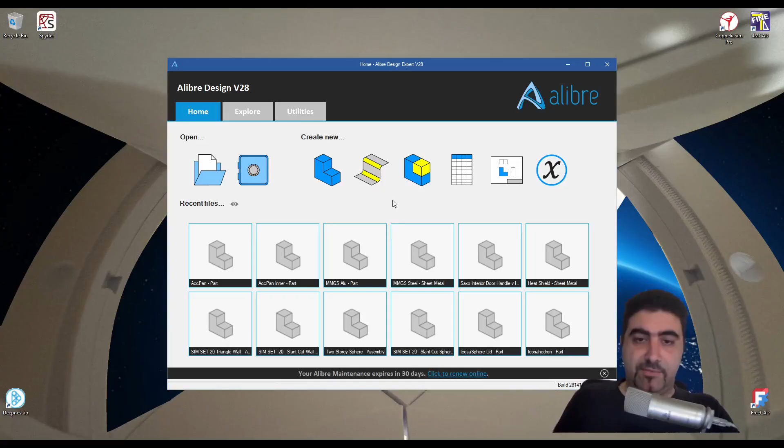With that out of the way, let's start a new sheet metal part. And for starters, I want to show you the shape that I'm after, right? So I'm going to start with a circle here, 120 millimeters, and I'm just going to convert it to a reference figure. And let's get a line going here. And okay, thank you. And a center arc. So this is roughly what I want to do.

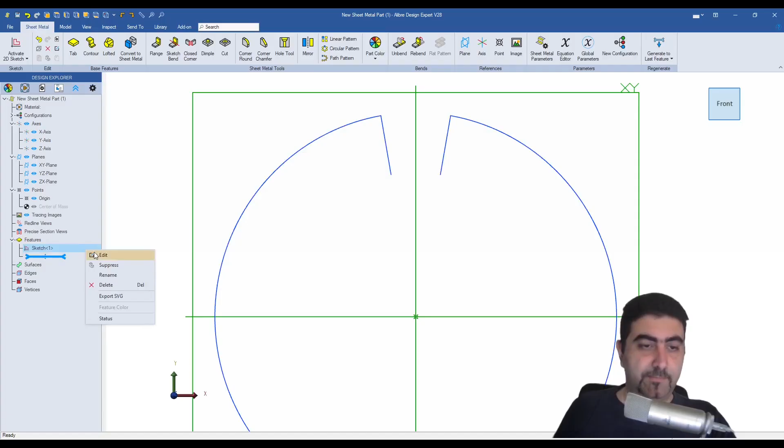Right, we'll make these two horizontal, and then we'll make these two horizontal, thereby making them symmetric. And then I'll just get this going through that center. Let's say that this opening is 20 degrees, and let's say that this other circle, you see it's not a full circle, it's giving me a radius. I hold shift and move it a bit and I get a diameter dimension.

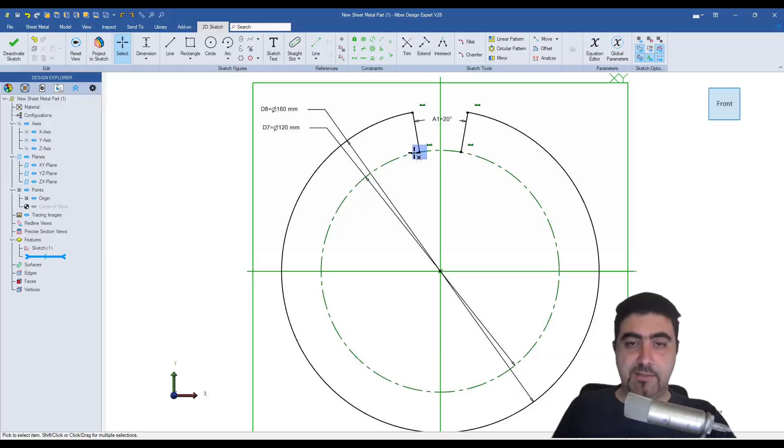Let's say that this is 160, which then in turn means that this line is 20 millimeters in length, right? So this is the rough shape I want to end up with. I want a couple of legs that also curve and go on there, and you can bolt it down, right? But I also need a bit of guide geometry, and I'll show you what I mean, right?

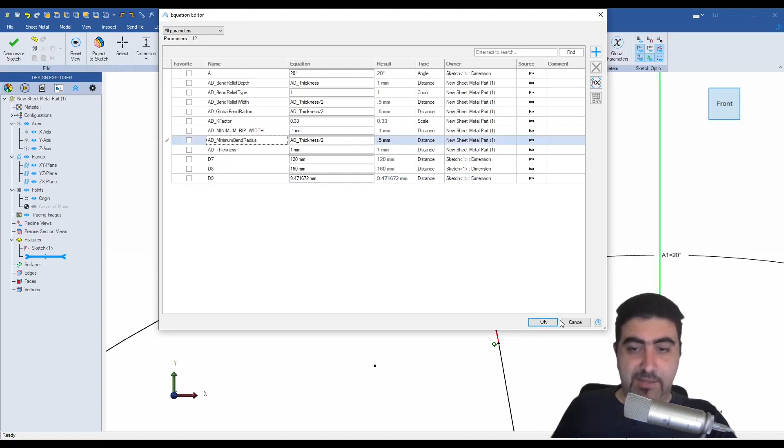I'll make an arc here. I'm doing all of this because I want to be able to take an angle. I'll make this equal to the minimum bend radius. Okay. And this can be a reference geometry. And these can be reference geometries too. So what I want actually is this angle. You see, it's not exactly 90 degrees. And I'll make that a parameter so I can use that.

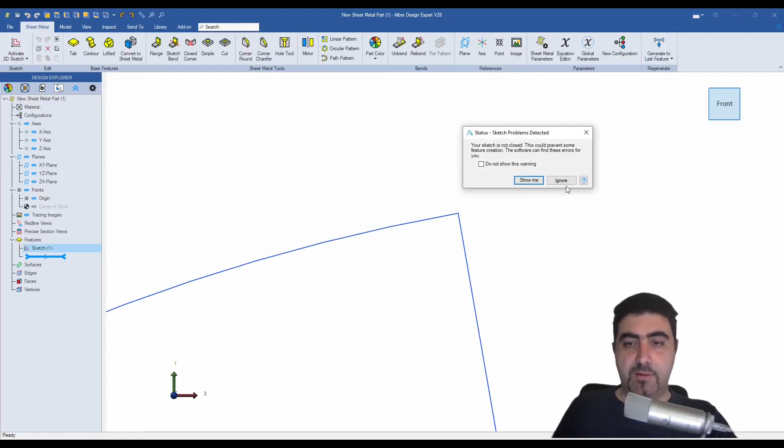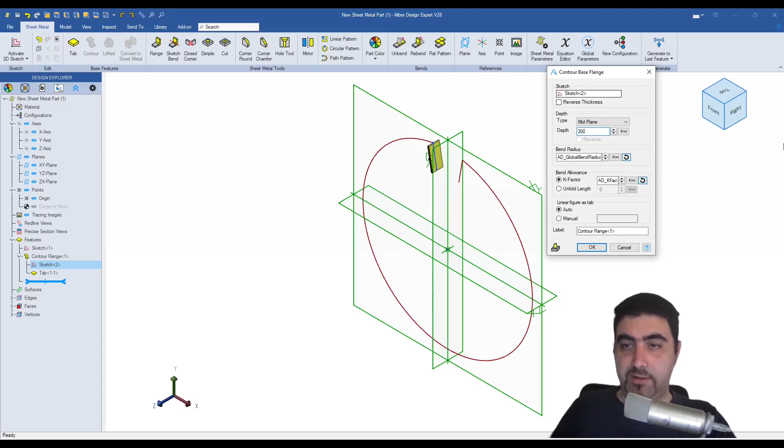Right? Now, sure enough, if I try and make a contour flange out of this, it doesn't like it. So what I'm going to do, I'm going to lift this up, you know, as a visual aid, if you like. And I'm going to project this first line in. I can do that because my sketches are toggled on. And now I'll make a contour flange. I want to make that 300 millimeters. And I want my material to be on the inside of my circle. So there you go, inside of my circle. So I'll start off with this.

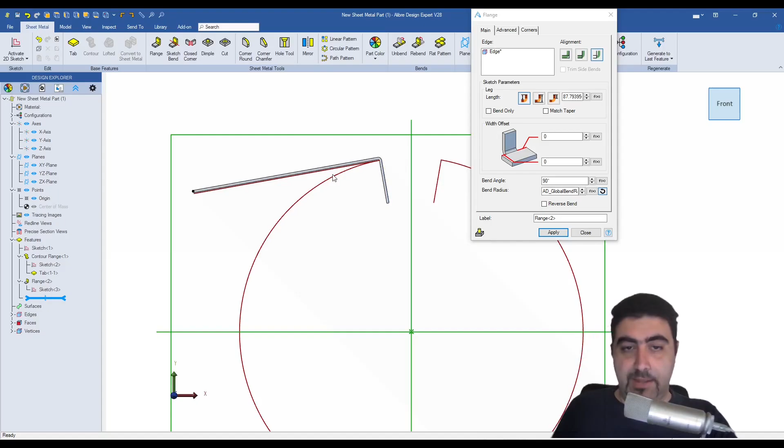Now, if I make a flange here, you'll see that I'm getting this bend angle here, and it's heading off to that direction. That's not what I want. I want it to go all the way around. And I know that this circle has a radius of 80 millimeters. But if I go and make this D8, even if I divide it by 2 to get the actual radius, look what's going on here. It's flying off to a completely different direction. That's not what I want, right? So I'll just bring that back.

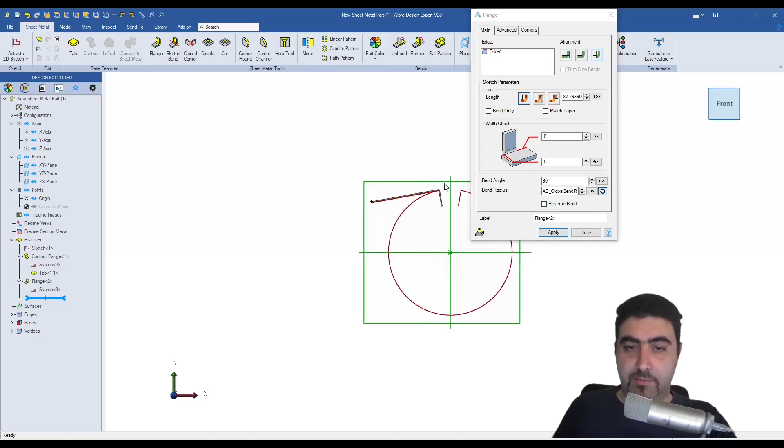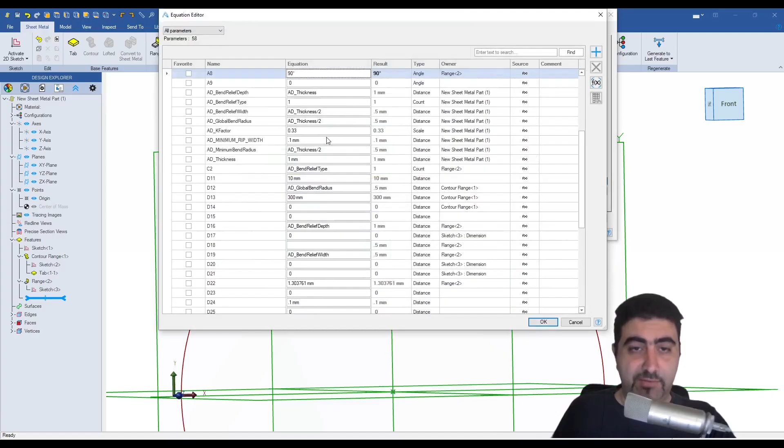So how do I do it, right? Well, first of all, I want it to be aligned towards the inside. So the way I do it is I don't make this flange. I click here in the bend only option, which is the option I want to show you today, right? Bend only. And you know, 90 degrees. Yeah, I don't want 90 degrees. I want the driven value that I got. So I want A2. So that's the angle that I want.

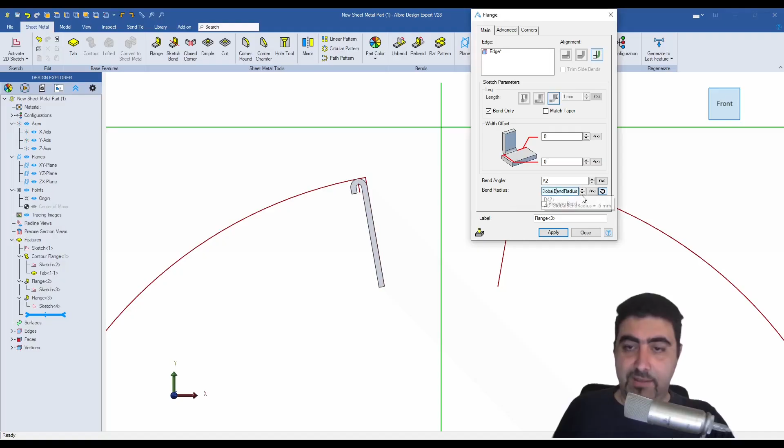Okay, well, what did we achieve here? Well, let's make a second flange on the inside again. Bend only is still selected, right? The angle we can talk about later. Let's look at it at this side. Now, if I change this, and it was D8 divided by 2, look what's going to happen. Look at that. It follows it pretty closely, and it goes around this circle.

Now, about the angle, well, I've got a 20-degree angle opening here, so if I say 340, look, it comes very close, right? You can see that it's coming really close, and that's pretty cool, right? Now, it's not following this circle precisely, and I'm not exactly sure how to make it follow that circle precisely. I've noticed that if I subtract half the thickness, it'll bring it in closer. But again, you can see it's not perfect.

Plus, this extends past this line. So how do we get that back? Well, we get that back by subtracting an angle here that's equal to the angle of a chord that has the length of twice the thickness. So we subtract, let's go into the equation editor, because that's a bit more comfortable.

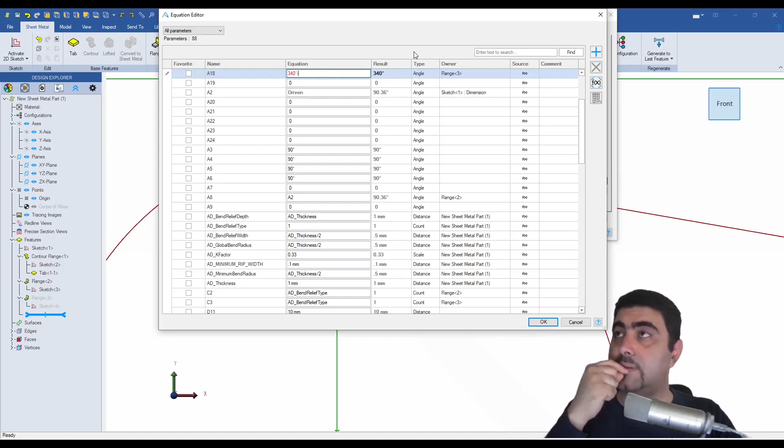So we subtract that chord, and the angle of a chord is the inverse sine of the chord length divided by the diameter. Is that right? It's twice the inverse sine of that. I'll put the equation up on screen. So let's go ahead and prepare that equation. So we want twice the thickness, divided by D8. Okay, now this is going to be pretty close.

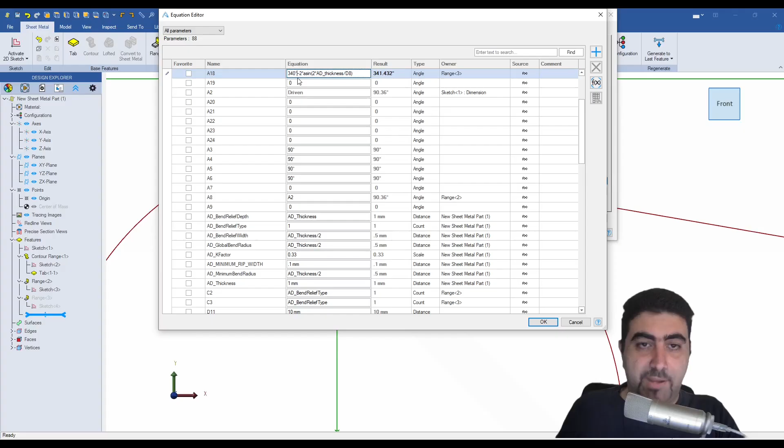Okay, if you look closely, I put the minus sign twice there. That's why it's adding. It only needs it once, and this should make more sense. Okay. Again, not perfect. I don't know why, but there you go. And now I can hit apply. Okay, so right, it's definitely usable in terms of a heat shield.

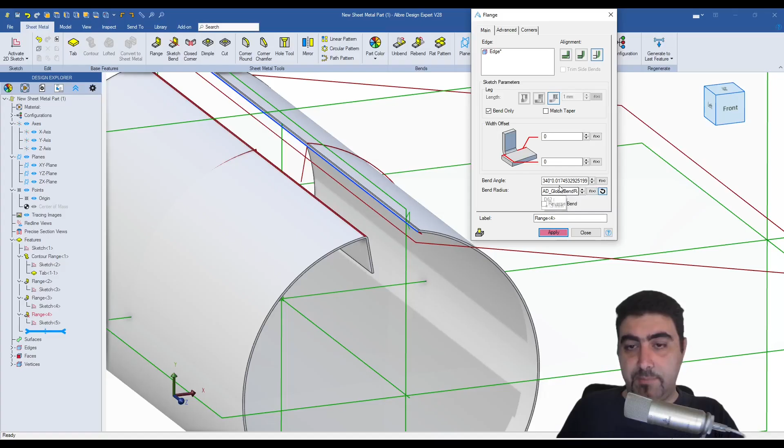So I'll make another flange here. Now I just want this to go back to the original bend radius, and I just need this to go back to 90 degrees. There you go. I've got my other bend, and I think it doesn't cooperate very well, but again, this is a part that I don't know another way to make, and I don't need it to be 100% accurate.

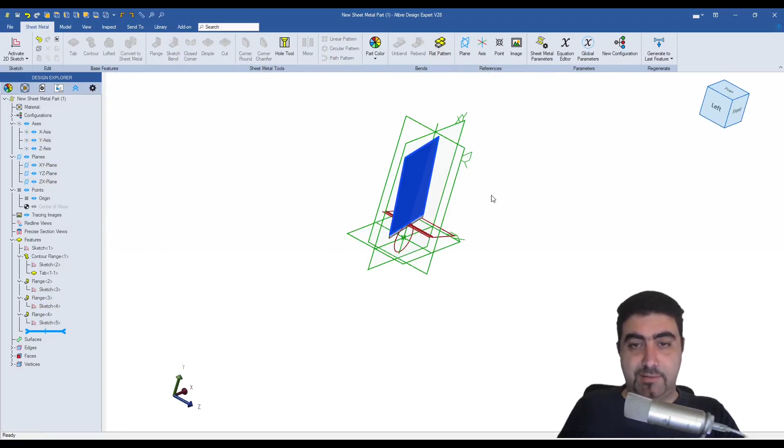But anyway, here's another cool tip. First of all, let me show you that this can actually flat pattern, right? No problem whatsoever. It creates the flat pattern. It's all well and good. Now, I want to get another leg that stops at the exact same point as this one does. So I'm going to do my imprinting trick, which I show in another video of mine. And I'll just make an angled rectangle here.

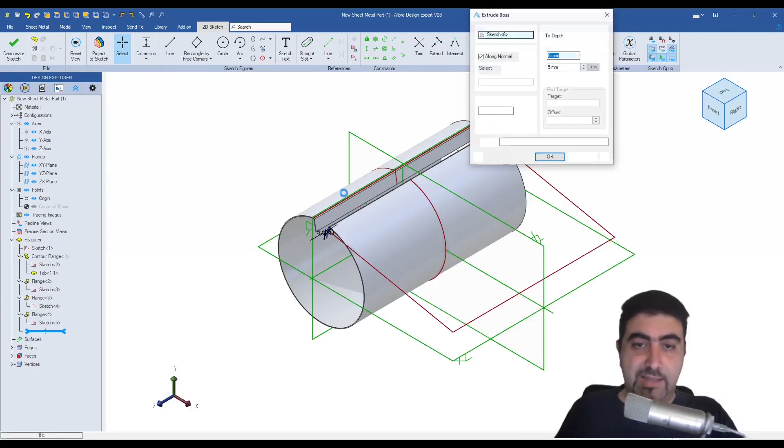And I'll make this point and this point horizontal. Now this is fully defined, even though it doesn't have a single dimension. And I will extrude up to this face. Come on, up to this face, right? Now, this is an extrusion, right? This is not a sheet metal tool. This is the normal extrusion that we all know and love, but you can still flat pattern it and it still works, right? Which is great.

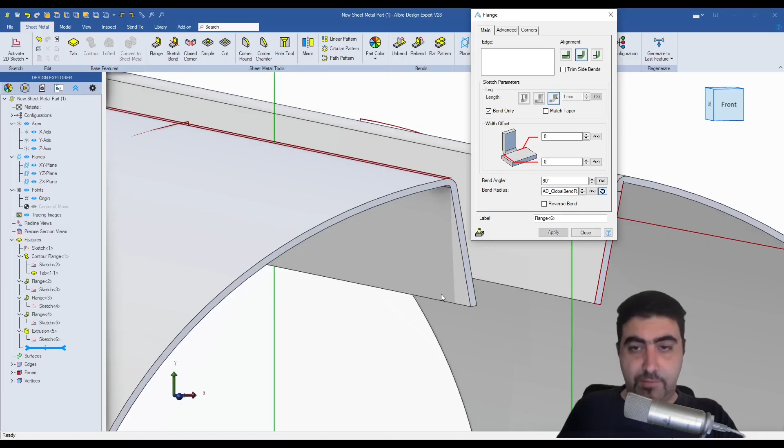And now I'll go and make the legs, and I will do it with the same basic principle that I've done everything else here. So now I'm going to make yet another flange like this, but now this radius is going to be the radius of the inner circle, right? And of course I don't need 90 degrees of that. That's too much. Let's do 15 degrees. Yeah, let's do 20 degrees. It's fine. Cool. And we'll do the same thing on the other side.

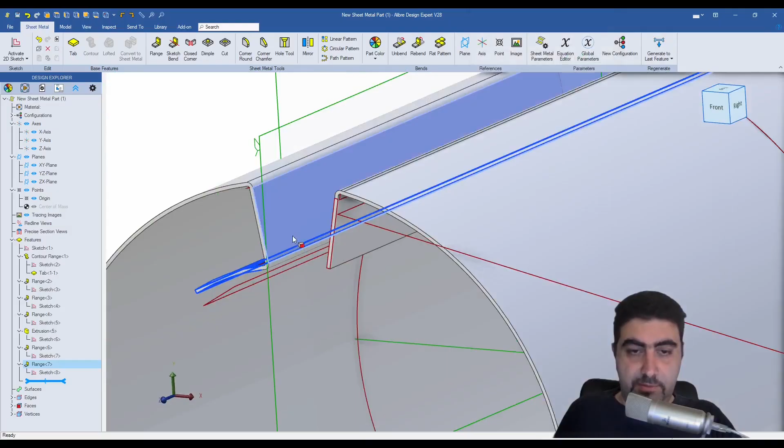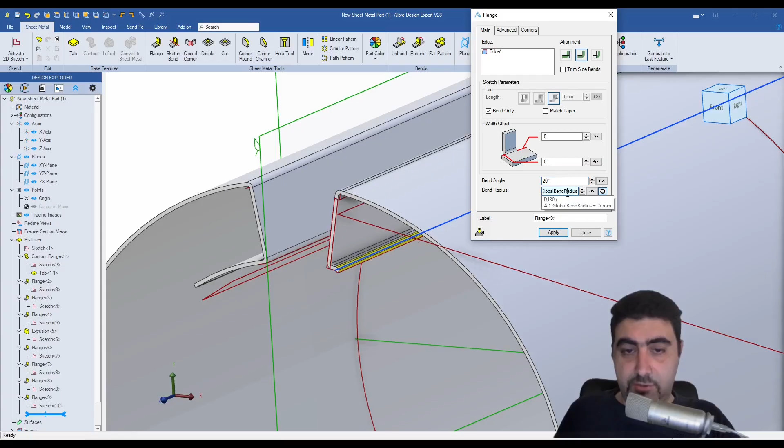Let's have nothing selected. There you go. Now only global bend radius, and this is 20 degrees. There you go. Oh, wait. We need to go back into this one and make sure it's aligned inwards. Okay, that's a lot better. And this is useless now, and this aligned inside. Now we're going to make this one. Same thing here. It needs to be on the outside. But again, these are not super critical dimensions, and I think it works well either way.

So now it doesn't want to cooperate. Oh yeah, well, okay, this is fine. Let's go back into sketch 1, and I'll turn this into a sketch as well. That way we can see how far off we are on both occasions, right? So this is it. For a part like this, it's nothing that a little bolting down is not going to cure.

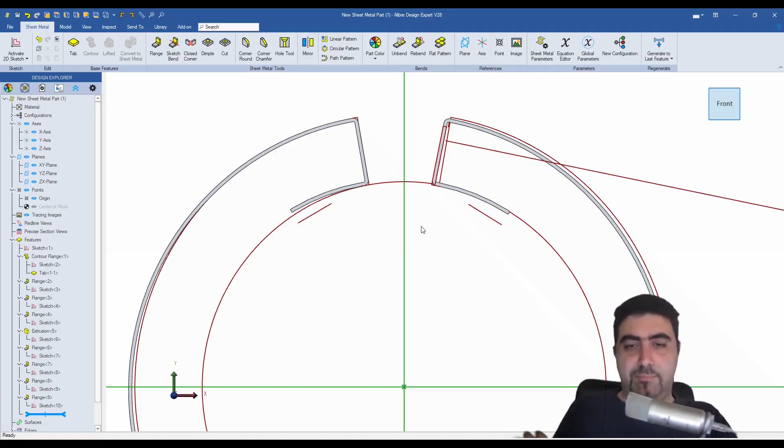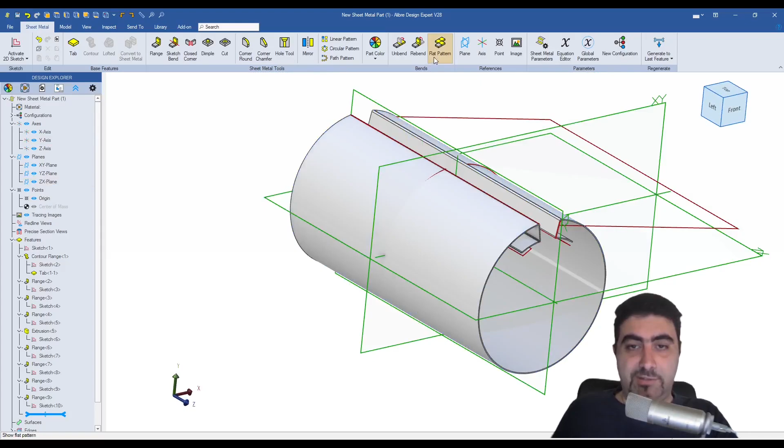But we've got some more work to do, okay? So this is our heat shield till now. It can still be flattened, which is great, because what I'm going to do now is select this as a flat face and then select every other bend and unbend it. Unbending it gives me the opportunity to create some features, whatever I like, and then bend it back up. And these features are going to bend along with the rest of my part.

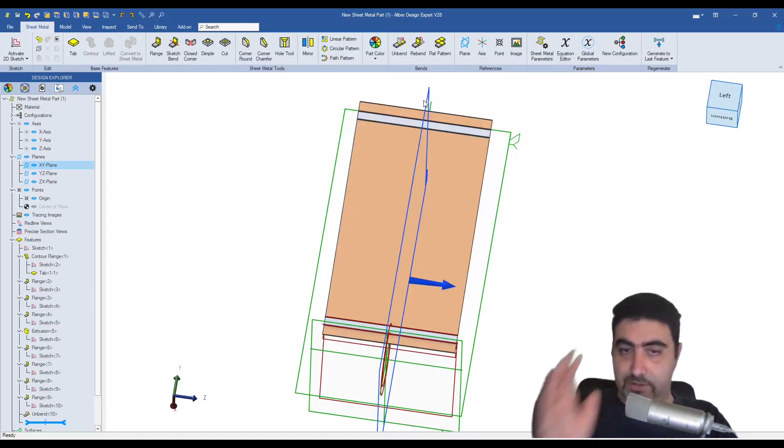So I've got this plane that's right in the middle. I'm going to make another plane in the middle of this edge. And I'm going to use the method I show in my video, how to make a mid plane from an edge. And it's done. It's one of my earliest videos actually on Alibre. It's in my original tips and tricks series.

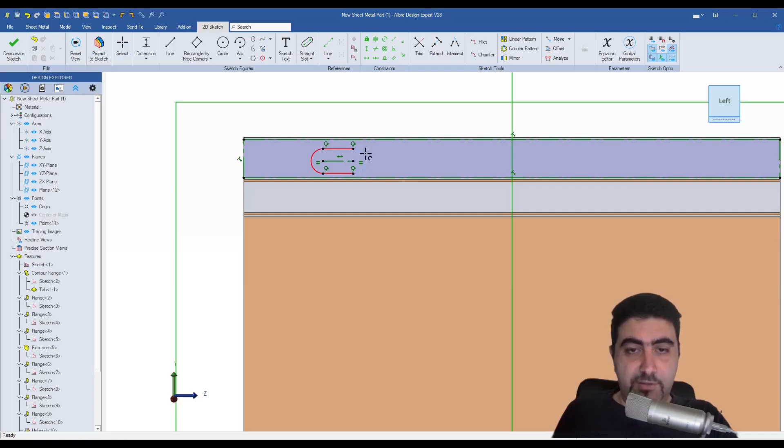Okay, so what I'm going to do now is sketch here. I will be doing some imprinting, and let's do a straight slot. I'll say that I want M6 screws, right? So 6.5 radius. Okay, so that's a bit large. Oh, okay, let's do M8 screws then. Wow, got plenty of room. Okay, so we want this to be in the center of this area.

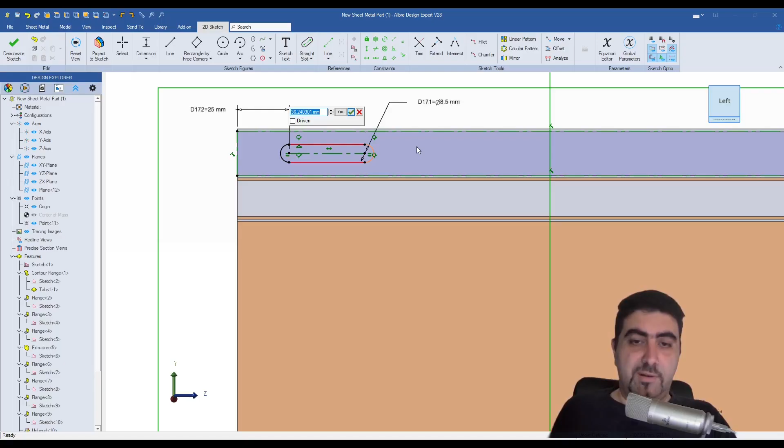Midpoint constraint with 3 points, again, shown it plenty of times in my videos. And I'll just make that 25 millimeters from the edge. Now, this is an 8.5 millimeter clearance slot. So the value of this dotted inner line is the amount of tolerance I will have on the bolt hole when I put the bolt in. So if I say that this is 1 millimeter, I've got 1 millimeter of play to wiggle the bolt left to right, right? I'll just give it like 3 millimeters here, should be fine.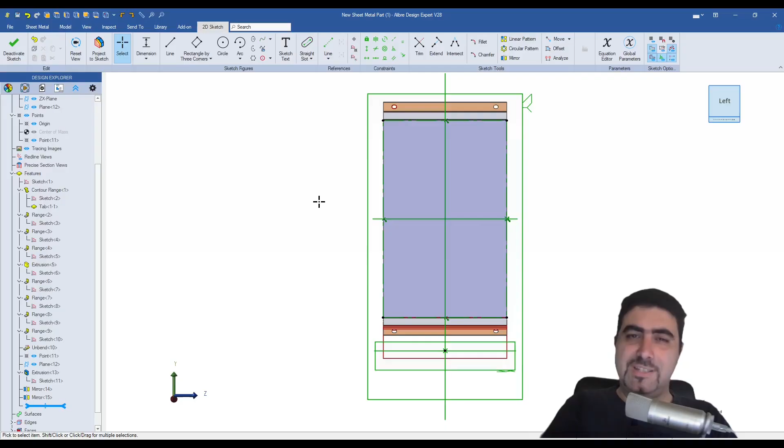So my bolt holes are done, but for a heat shield to work, you need holes there so that you can get some airflow moving through it, right? That's what kind of cools it down and shields you from the heat. So I'll need this length as a parameter, and I'm going to be using the equation for my linear patterns, my linear fill pattern equation. Again, that's in another video. And I'll just make a slot here. And I'm kind of going for beauty now, right?

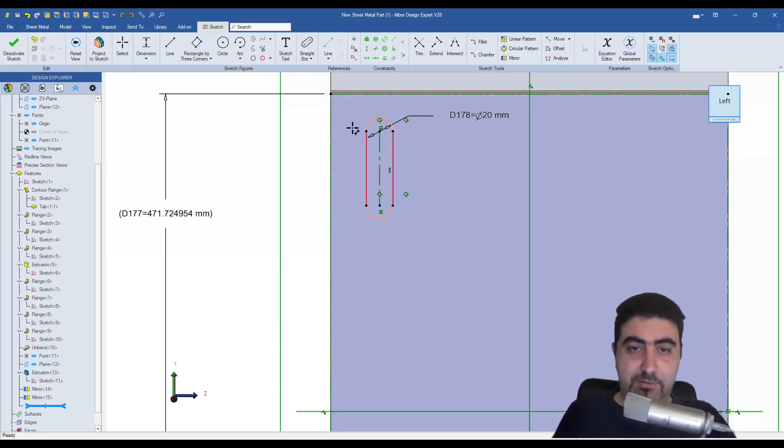Right, so let's say that this is 20 millimeters. Let's make it 15 millimeters. And let's make this length 30. So this entire thing should be 45, right? And I'll say that this is 15 millimeters from the edge. I'll also say that in this case, it's always 2 for me. So there you go, it was 2. Let's make that 20 millimeters.

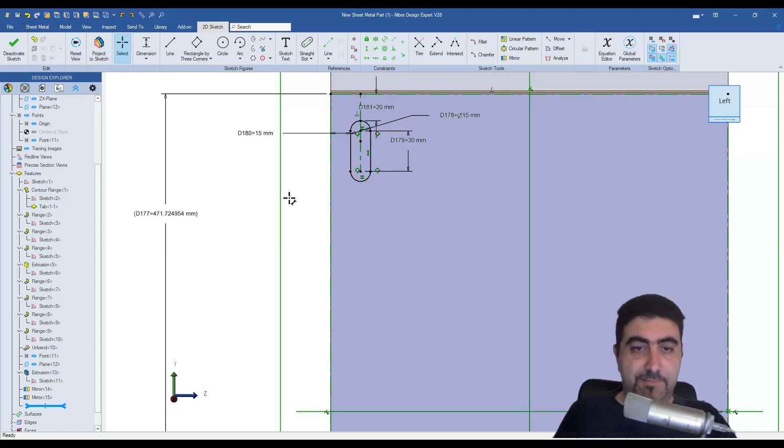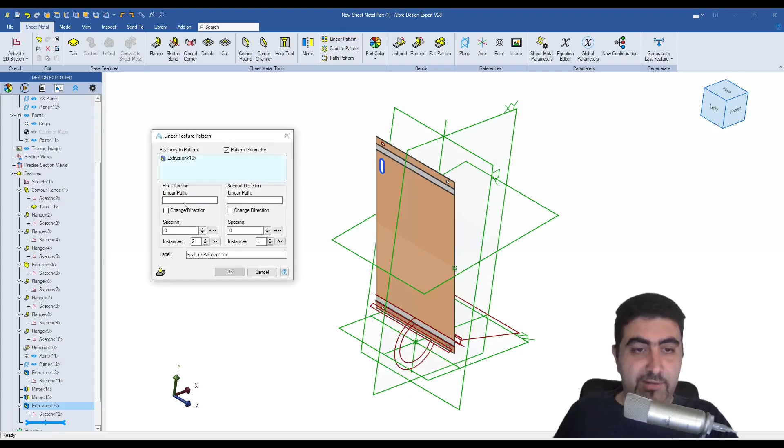Yeah, that's fine. So now what I need is the total length, which is the sum of these two values. I need this length, which I have. I need this length, which is the value in my contour flange, right? That 300. And I need the distances from the edges. Okay, so I'll just make this cut and proceed to the linear pattern. So one of my paths is going to go that way. The other one is going to go that way. I want to know which variable this is. This is C9. I'll go for 7 times.

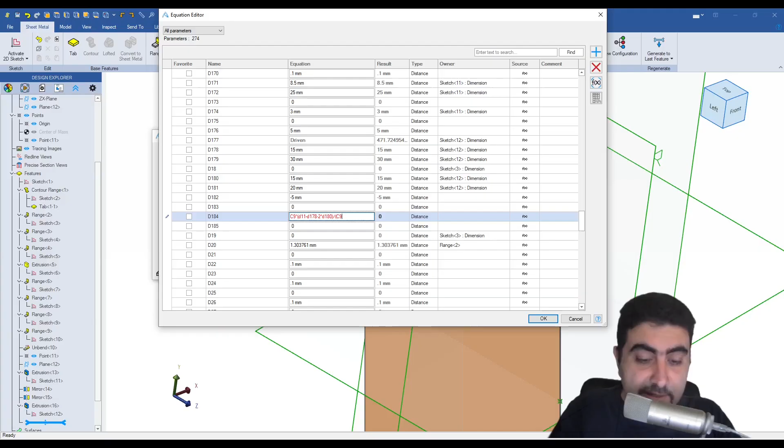Now for the spacing, C9, which we just checked, times the total length. Now the total length is my contour flange value, which should be somewhere here. Contour flange 1, it should be a value of 300, so it's D11. So this is D11 minus the width of the feature that I am patterning, and that is 15. This is D178 minus twice the distance from the edge, and that was 15. So twice the distance from the edge, D180. And then I'll divide this with C9 squared minus C9.

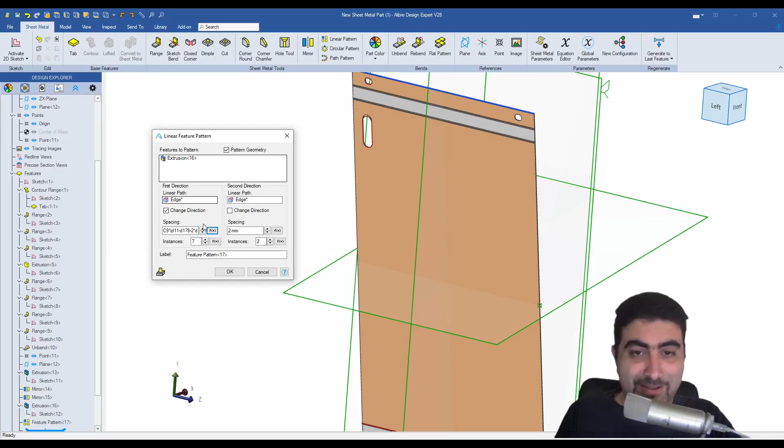So let's do that. Okay, change direction maybe. Yes, so I forgot to put this exponent there. So now it's C9 minus C9. So I just need to put a 2 there, and this will work. Okay. Change direction. There you go. This worked. Now, the reason I do this is because I can change the number of instances and it will distribute them, right? So now I'll say that I want 7 instances going down.

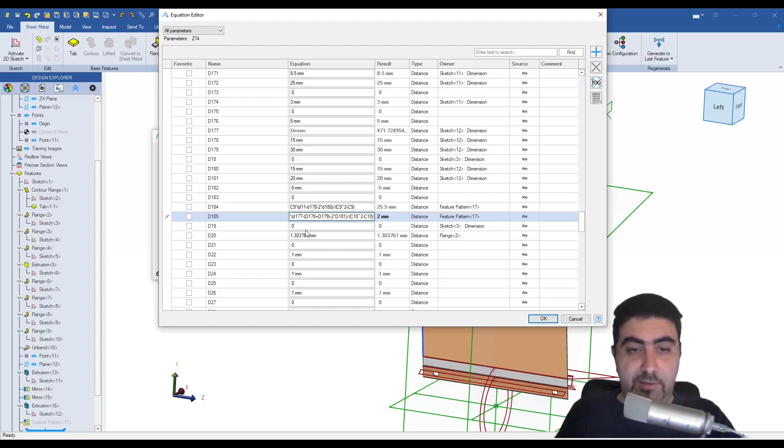This is C10. So now we're going to do the same thing over here. C10 times, I open my parenthesis, and I want my driven value, which is D177 minus. So now the length of the feature is D178 plus D179, and I need another parenthesis going in here so that the signs don't get messed up. So minus twice the distance from the edge, which was 20 in this case, which is D181, and I divide it now by C10 squared correctly this time. There you go. This looks like it's gonna work. There you go. And we can add instances here. 10 is a bit much, isn't it?

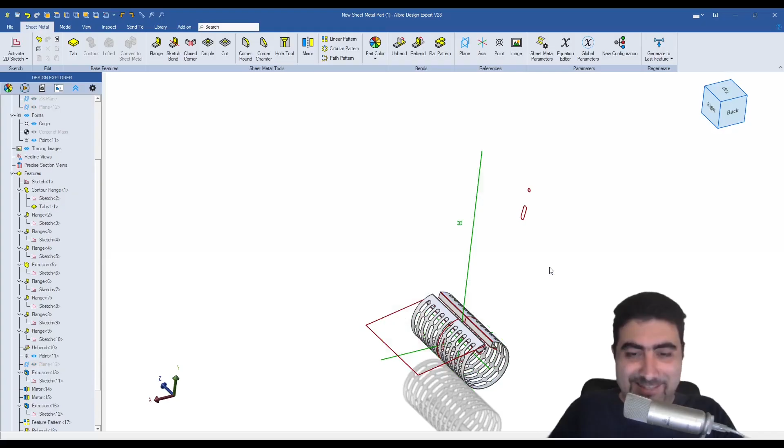And that's it, guys. We have made our heat shield, and all I need to do is rebend, select all unbent bends, and click OK. Let's check this out. Oh, this is cool, man. This is a cool looking part. It is. Check this out. Right? We've got our bolt holes slightly slotted, and got them on the other side as well. And we've got the cutouts for the air to go through. And this is a beautiful part, right? It really is.

And the beauty of it is it still has a flat pattern, right? You can still get an annotated flat pattern on how to make this, right? Which I think is awesome. So that's how you make a heat shield, guys.